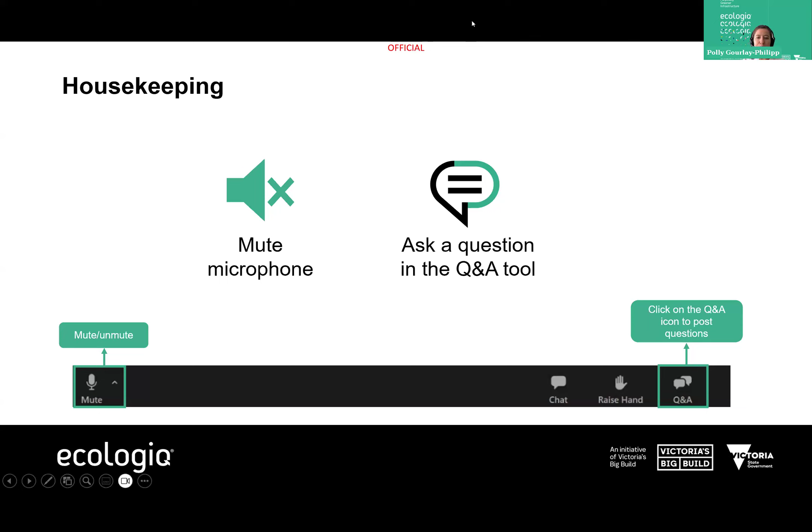Okay, so I will now hand over to our presenters, and they're going to give us an overview of their projects and talk to us about how they've managed to get recycled materials. Pass over to Daisy.

Daisy, I think you're on mute. Just unmute yourself there. Thank you, Polly. Still a novice with Zoom.

Good afternoon, everyone. I'll quickly do an overview of the sustainable material initiatives we're using for the Waurn Ponds duplication, and then we'll do a deep dive into the engineered containment of Category D soil, discussing what that is, the sustainability outcomes, the process to complete it, and some of the project opportunities we've identified. Then we'll discuss some lessons learned that should be incorporated into future projects.

You'll see on the top right-hand side a brief overview of our project. We're duplicating 8 kilometres of track, completing 2 station upgrades, and removing 2 level crossings with rail-over solutions.

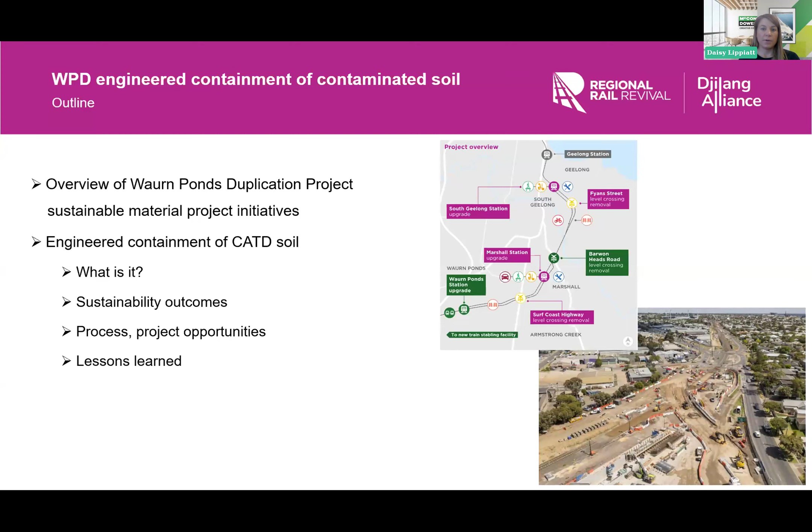Some examples of the sustainable material project initiatives we're completing include the substitution of the steel mesh in non-structural concrete with eMesh, which are recycled macro-synthetic fibres. We're also incorporating reclaimed asphalt pavement as much as we can on the project, and substituting concrete pipes with recycled plastic StormPro piping.

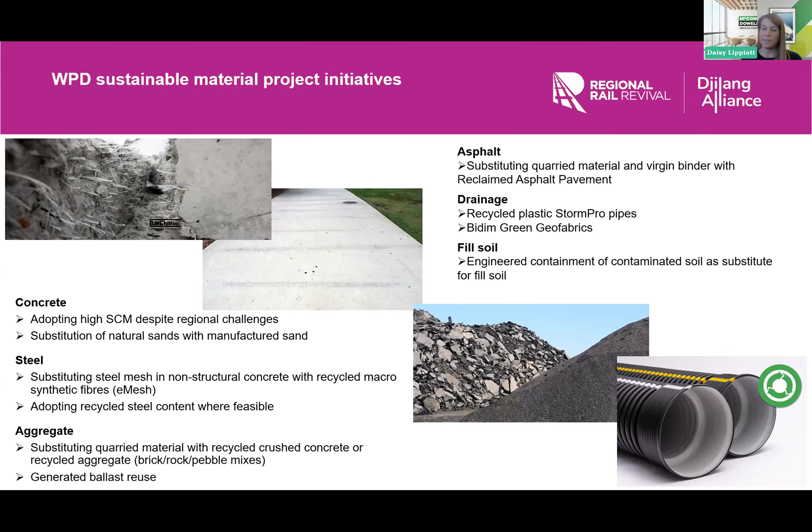So now it's time for the deep dive, contaminated soil reuse. Contaminated soil reuse is a permissible activity with EPA Victoria that requires an issued A17 permit from the EPA to complete it. The purpose of this is to create a meaningful, purposeful reuse of category waste soil that's sourced from a project to be reused within that same project area. The key thing is the reuse of the soil must provide amenity without causing any harm to the landscape or the community.

For those unfamiliar with contaminated soil, I've provided the different hazard categories in the bottom left corner. So you have Cat A soil, which is the most hazardous category, and fill material, which is the least hazardous. Recently, EPA created a new hazard category, Category D, to account for that lower environmental risk associated with a lower level of contamination that could potentially be reused, as long as the risk assessment is completed and you have EPA approval to do so.

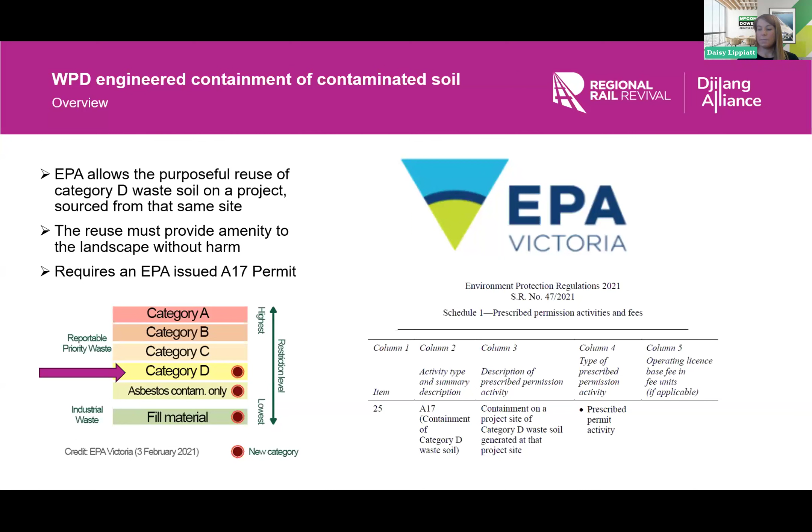Some examples of sustainability outcomes from the reuse of contaminated soil include a reduction in the carbon footprint associated with transport, since the soil is reused close to where it's sourced. However, on regional projects like ours, the closest disposal facilities are over an hour away. On top of that, instead of using clean material in these containment solutions, we're using contaminated soil that was destined for landfill. So it's a beneficial reuse that supports the waste management hierarchy.

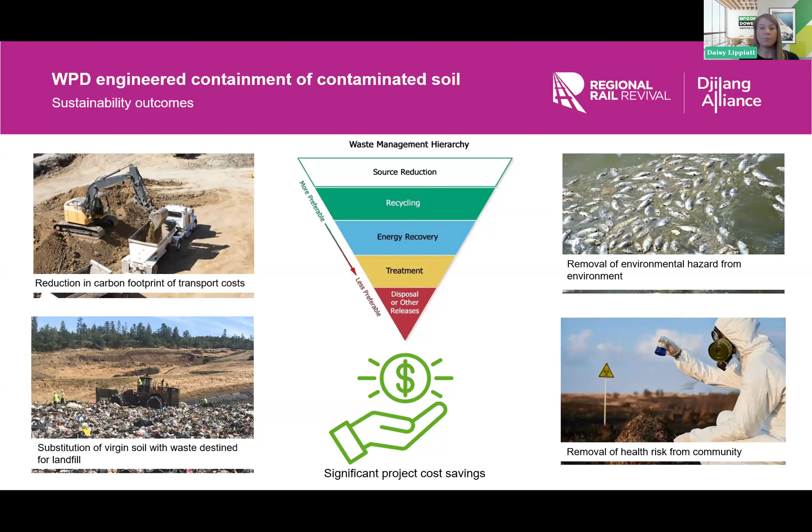The reuse of soil can also result in significant cost savings to each project. It's important to consider that we're actually removing the current hazard from the environment and health risks from the community into a contained, permanent solution.

The process for containment is a lengthy pathway, but can be done easily with enough project support. It starts with a feasibility assessment, where you look at the solution and opportunity available. You consider the land use, future land use, landowners, a cost-benefit analysis to check it's feasible, and the future development potential of that land. If the feasibility is viable, you can then look at the current design or modify it to facilitate reuse in that location.

Once the design is finalised, you complete a risk assessment that accounts for any sensitive receptors nearby the reuse location. Then you look at your reuse opportunity and run a series of models to determine the environmental risk.

For example, in the bottom left corner, we have an infiltration assessment we've completed for one of our reuse opportunities, looking at the amount of water that enters and passes through that soil, and whether contaminants might be carried with that water elsewhere, creating environmental harm.

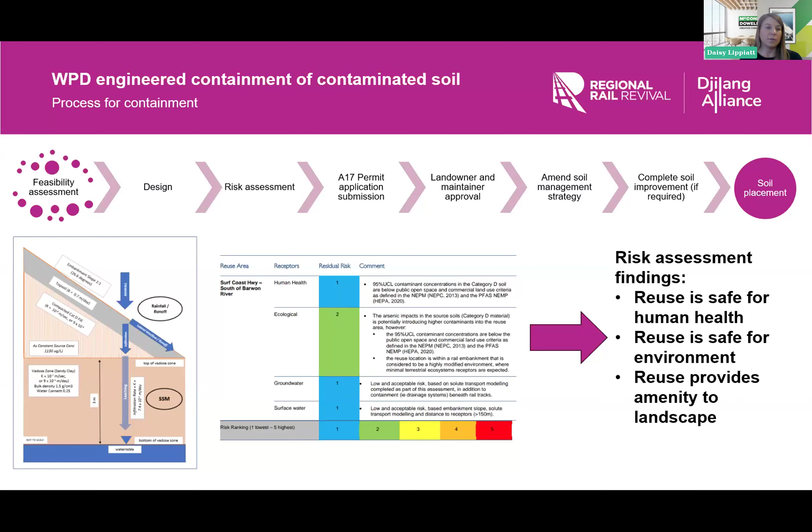If your risk assessment finds the reuse is safe for human health, safe for the environment, and provides amenity for the landscape, you can proceed to submit an A17 application to EPA. Whilst that's being processed, you can obtain landowner and land maintainer approval, amend your soil management strategy, and complete any soil improvements required before placement.

This is an example of some soil improvements that may be required on your project. When we started excavating the fill soils that were Category D, we found a high amount of inert waste in it - rubble, bricks, and so on. So we passed it through a screen, shown in the middle photo, which was 50 mil, removing all the large aggregate and improving the quality of the soil for reuse.

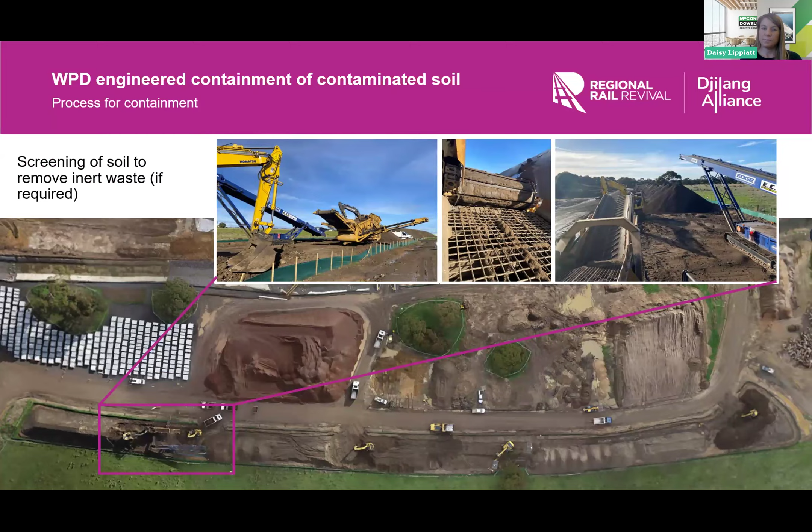In some applications, further geotechnical improvements are required to reuse the soil, and the project facilitated this with the application of lime, which is generally preferable to do in location. So as you place each layer of soil, you run a layer of lime. This also helps remove environmental risk because it locks in and reduces the leachability of the soil.

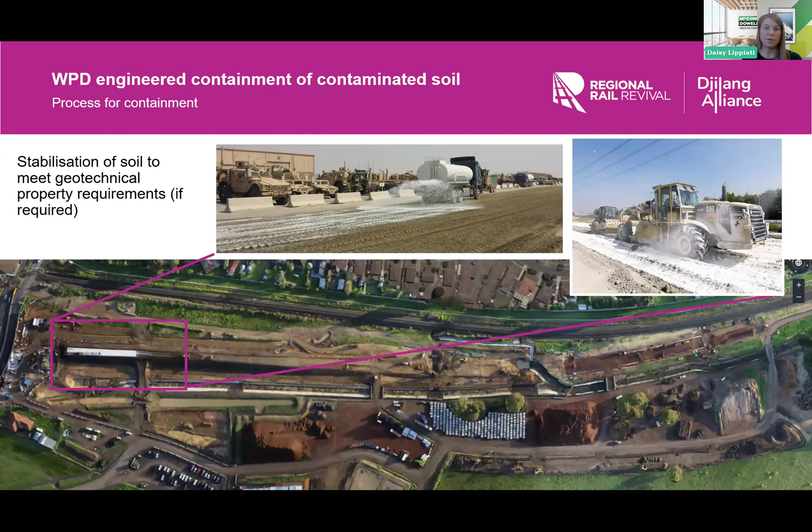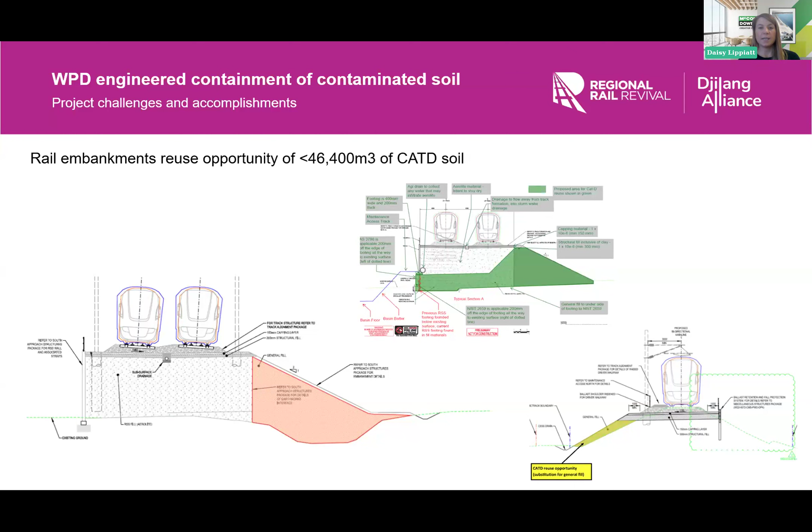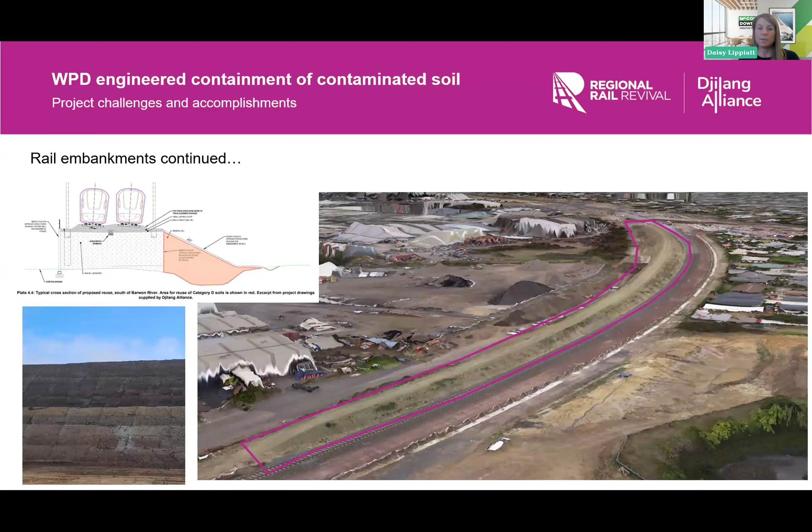I'll provide an example of where we're at to date with one of the embankment reuse opportunities. You'll see in the bottom right-hand corner that drone footage, circled in purple - that's approximately 11,000 cubic metres of Category D soil we've placed there to date. That's been screened and stabilised, and we've applied a polymer to it regularly to make sure it doesn't emit any dust during construction.

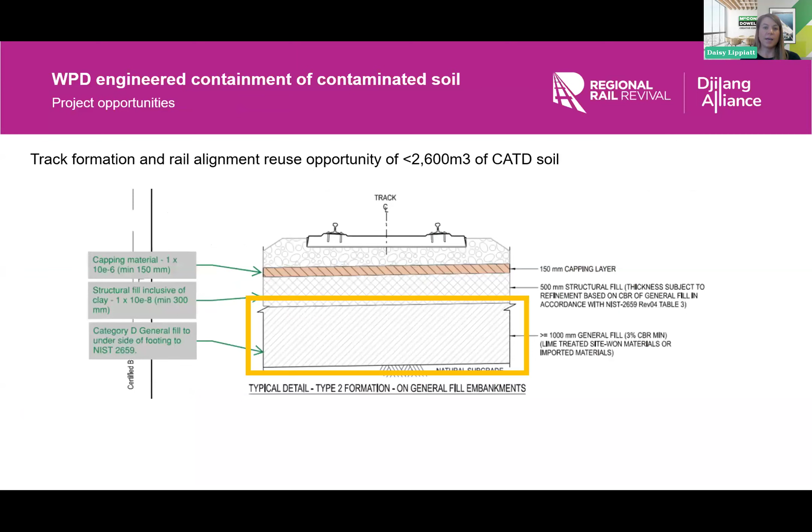We've also identified another 2,600 cubic metre opportunity of Category D beneath the track, and another 3,300 cubic metres within the station platforms where we could use soil to fill the platforms.

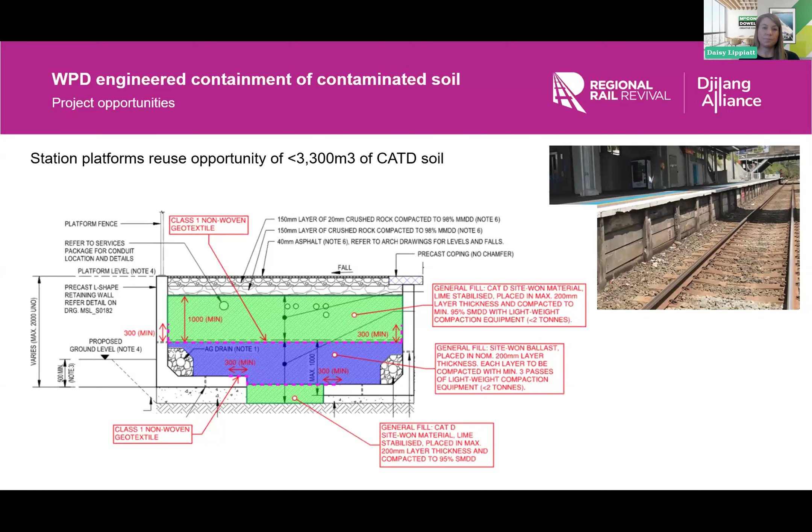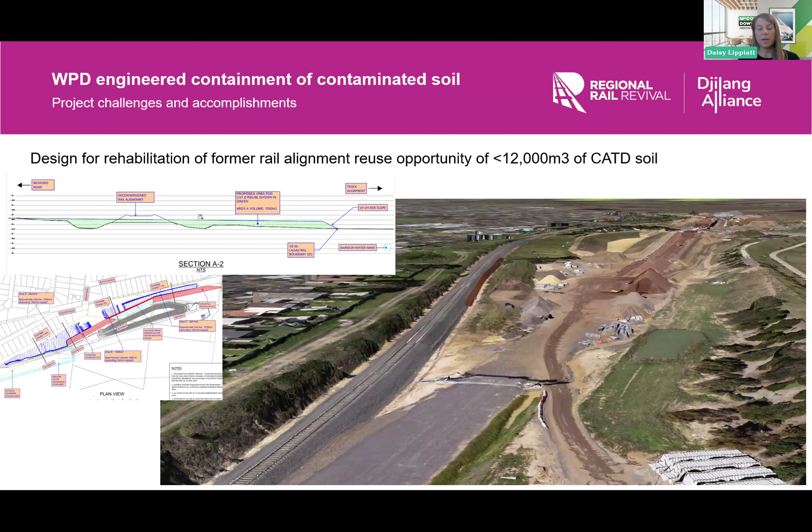This is another opportunity we just identified, in the same location, on the other side of the track, where the design solution has the rail embankment immediately joining the embankment of a pre-existing road. Obviously these two embankments will have large maintenance requirements to prevent erosion and facilitate speed of sheet flow. So we're currently doing a feasibility assessment to see if it would be beneficial to fill that area, and if so, we could substitute it with category D material.

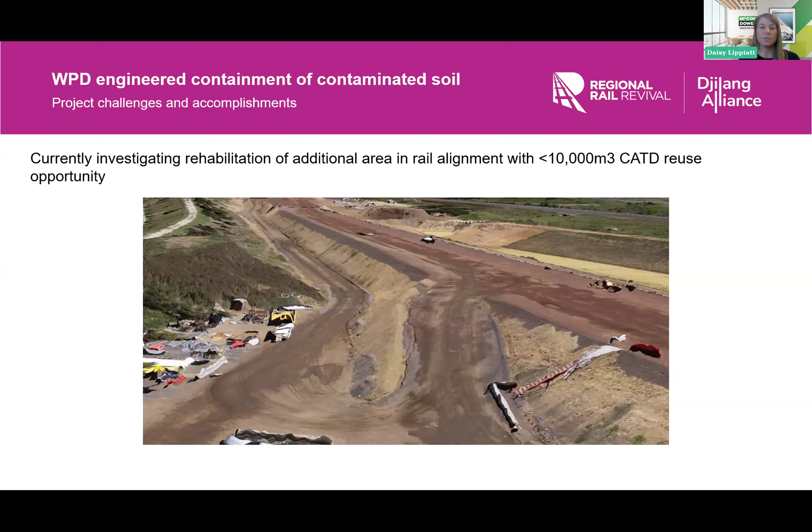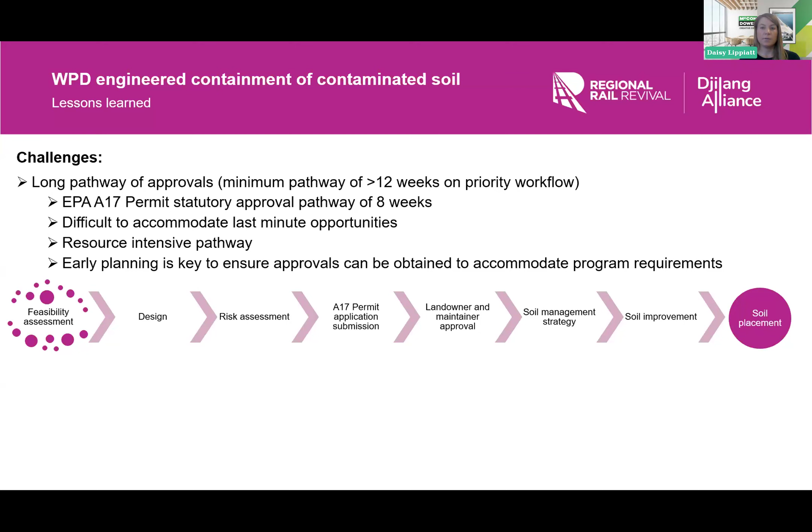Now to step into some of the lessons learned. It's important to consider the approval pathways for these opportunities, from design development to issue of A17 permit and landowner and land maintainer approval. Generally on this project, the timeline takes anywhere upwards of 12 weeks, with 8 weeks of that embodied in the statutory approval pathway for A17 permission. So it's obviously difficult to accommodate last-minute opportunities, which really enforces that early planning is critical for success.

The key driver of risk in the reuse of category D soil is the complexity of the material management strategy and the need to incorporate change into that strategy. At the very beginning, the project developed a mass haul diagram where we mapped all the soil that would be generated in each location at each stage of the program. We then compared that with the reuse opportunities we had, how much we could fit, when placement was required in terms of the construction program, and any foreseen risk where we might have to do soil improvements. This enabled us to identify the stockpiling requirements of the project.

It's important to accommodate an extra risk value in the size of your stockpiling area, because if you find soft spots or for other unforeseen reasons, you may end up generating more soil than forecasted. It's also really important to consider proximity to public in these stockpiling areas, depending on the soil classification, nature of the soil, or any treatment required, whether screening or stabilisation. These are dust-emitting activities and sometimes quite noisy, particularly the screening of material, so it's important to use areas outside of direct proximity to the public.

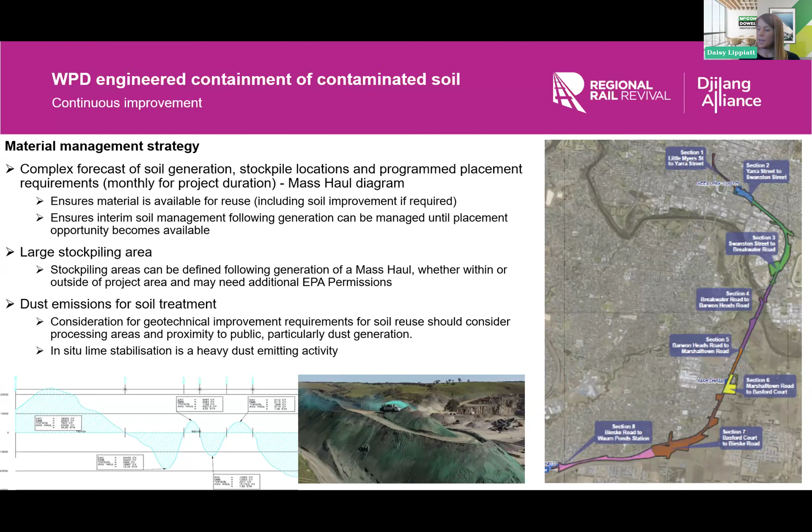An example of the challenges we had: I've provided a picture on the right-hand side of our project area. The blue and green area is where the Category D soil is being sourced from, and as you can see, it's a very confined rail corridor in very close proximity to the public. So for us to complete the reuse strategy, we hauled it to the other side of the project, shown in brown below, where there's a lot of agricultural area, which prevented public exposure and avoided other sensitive receptors.

Largely due to material management, we lost a couple of opportunities. Very early in the project, the program for generating the soil was actually behind the program for the embankment. That meant we weren't generating enough soil to feed the need to place soil in the embankments in the south. So essentially, we weren't able to utilise the full opportunities in both embankments because we just weren't generating enough soil, and we ended up having to substitute that with Site 1 clean fill soil.

Another unfortunate loss was the opportunity in the station platforms.

Obviously, you're not able to fit the stabilisation machinery within a platform. So the project was going through the process of having ex situ soil improvement stabilisation completed on that material, but the approval pathway outweighed the time we needed to place that material in an occupation critical program. That being said, our current forecast of Category D soil reuse is over 40,000 cubic metres across 7 different locations in the rail corridor.

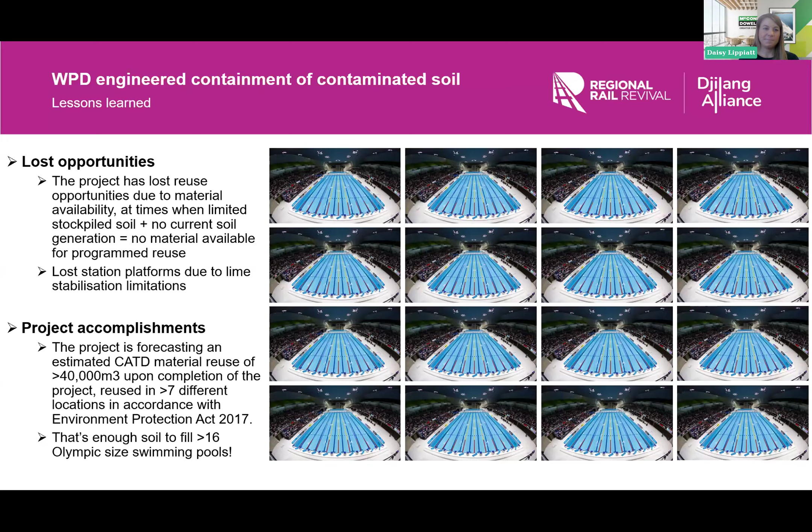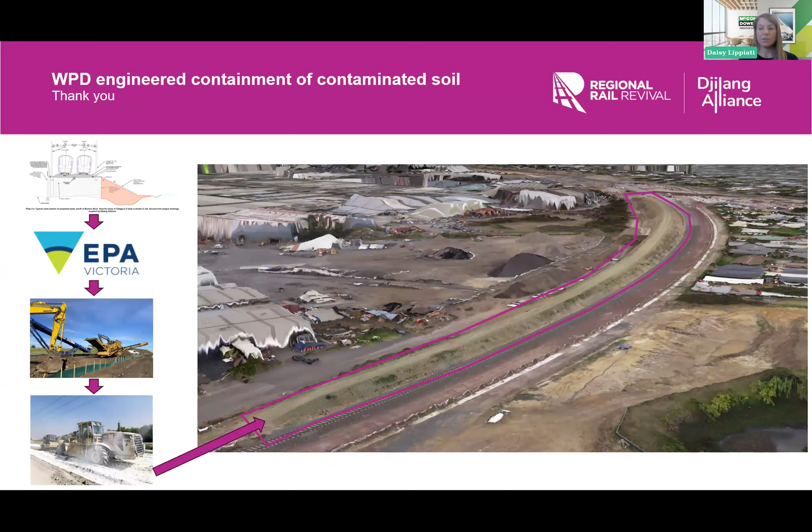Thank you so much, Daisy, and thank you everyone who joined in and all the panelists. I'm Akash, I work on the Shepparton line upgrade, as Paul introduced me. Quickly, an overview of the project: the Shepparton line upgrade runs between Donnybrook and Shepparton. It's a regional project, and the plan is to get the VLocity trains running on the line.

It's done in stages - stage 1, 2, 3. Stage 1 was just to have 10 weekly services. Stage 2 was upgrades at three stations - Nagambie, Murchison East, and Mooroopna - accompanied by a Shepparton stabling yard where we did 2 stabling roads, and a lot of signalling across 59 level crossings commissioned over the whole stretch of 120 kilometres.

And now we transition to stage 3, which basically did track upgrades to enable VLocity trains to run from 110 kilometres an hour to 130 kilometres an hour. Signalling upgrades as required, had road 3 added to the stabling yard, and minor works for culvert replacement, culvert repairs, track culverts, and drainage. One thing we also did was a Murchison crossing loop as part of stage 2, which is a 90-degree bend.

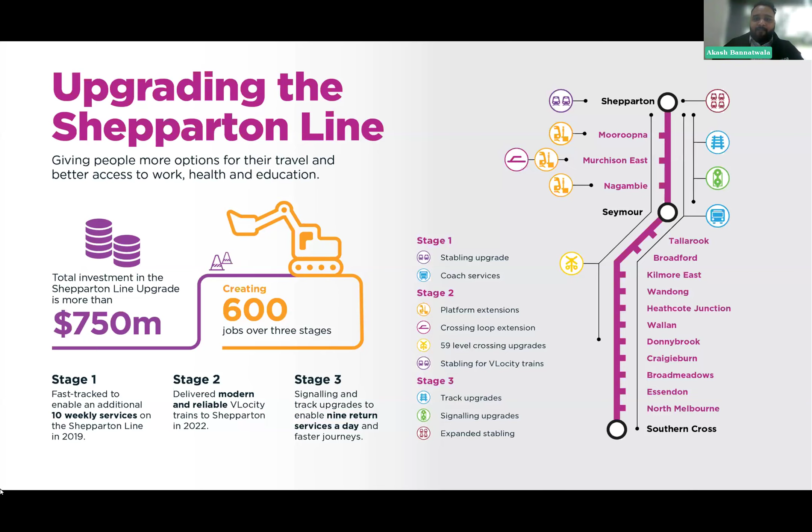Moving on to the sustainable products we used over the whole SCU project. Although being regional, we managed to get concrete mixes with 40% SCM into it. We're also utilizing e-mesh and MP47 fibers for reinforcement, and some fiberglass reinforced posts for the retaining walls for ballast retention. We managed to get a lot of our Cat D spoil, which came out of our mud spots, turnouts and track works, into a legacy gold mine remediation in Indigo. And for the CSR works, we did signalling conduits, which are multi-layered sandwich conduits.

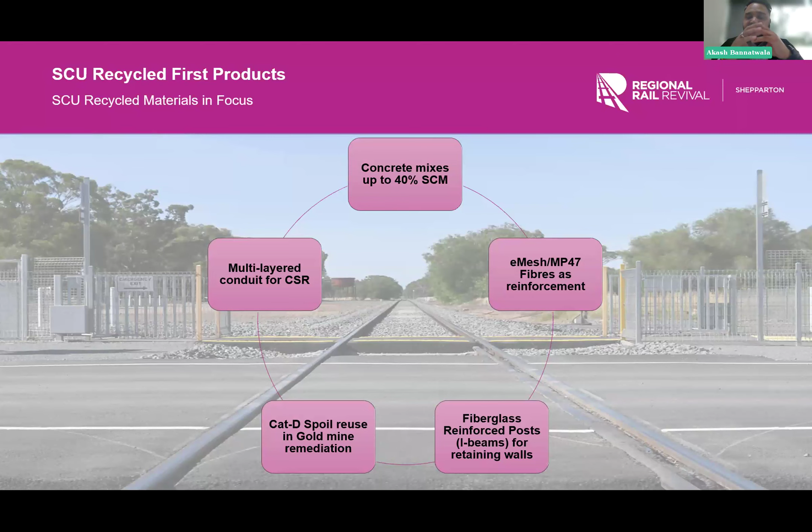Now I'll take you into detail of each quickly. Concrete mix first: the project was able to utilize a lot of EnviroCrete concrete mix, which has 40% SCM. The major areas where this concrete mix was used were kerbs, channels, a bit of laydowns, and a lot of road authority concrete mixes as well. Supply for us was Borough, and it was really good because it was a good mix in terms of getting the transport sorted and logistical cost sorted, since it was based out of Shepparton.

Next is our concrete track sleepers. These are broad gauge sleepers, and we replaced 55,000 timber sleepers with concrete sleepers. All our concrete sleepers had 20% SCM into them, which is slag. It came from Austrac, and it was a really good win for the project because it's a lot of precast concrete mix, precast concrete used on the job.

Next is the Select-Crete mix. The Select-Crete mix has SCM as crushed concrete, apart from slag or fly ash. Sometimes it's really hard to get a concrete mix which has a coarse aggregate used as a supplementary cementitious material. Our Select-Crete mixes are non-structural - we're using them in the signalling location boxes and concrete pads. We have 41 pads to build, so instead of crushed rock, we're doing some concrete pads. We're trying to utilize as much as we can, and Mawson's has that mix, which recently came up and is really good to use.

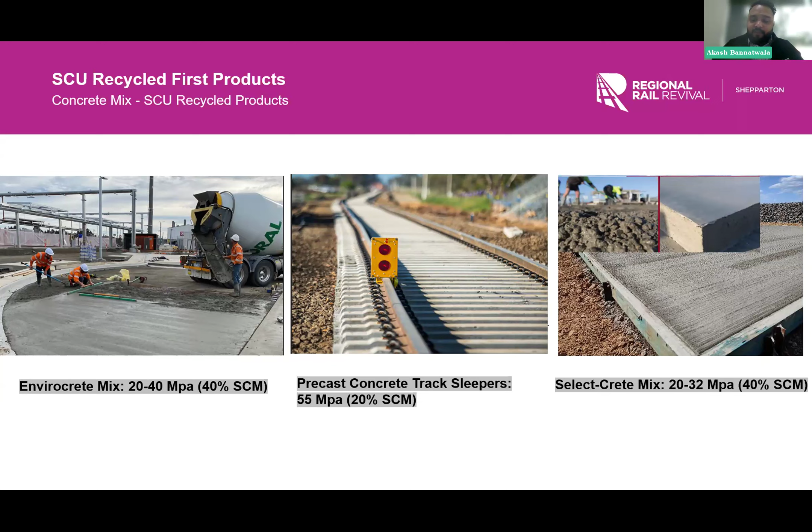Next, coming to our e-mesh and MP47 fibers - e-mesh, as everybody knows, is a really good fibrous mix that provides really good strength in terms of reinforcement. We plan to use e-mesh in the road or footpath extension we're going to do at Mooroopna Station. We're going to build a new footpath with e-mesh as reinforcement instead of steel bars. It's a really good win for the project in terms of sustainability, because the footpath is over 200 metres, and we're going to utilize across 100 metre cubes of concrete, which has added benefits as well, because you're saving cost on steel, manual handling, labor, and everything.

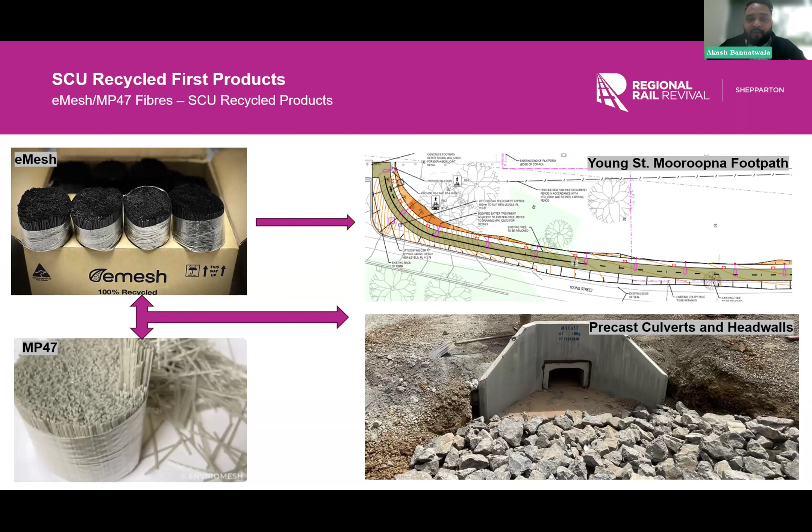So we're going to use that in our Young Street Mooroopna footpath extension. We also used some culverts, which came out of one of the suppliers, with a mix of e-mesh and MP47 as reinforcement. It was precast, and Burrell supplied that mix as well. It was actually a good win for the project in terms of all the reinforcement steel needed for a lot of culverts. The culverts were in sizes between 600 millimeters up to about 1000 millimeters. So that's one of the good uses on the project.

Moving forward to the fiberglass reinforced I-beams. During our design stage, when we were planning retaining walls for ballast retention, part of the track works involved lifting the track, which meant topping up with much more ballast so it can have a better payload for the trains traveling on it. So our designers and us came up with a solution to replace the steel posts with fiberglass reinforced I-beam posts, which are a fiber and glass mixed reinforcement.

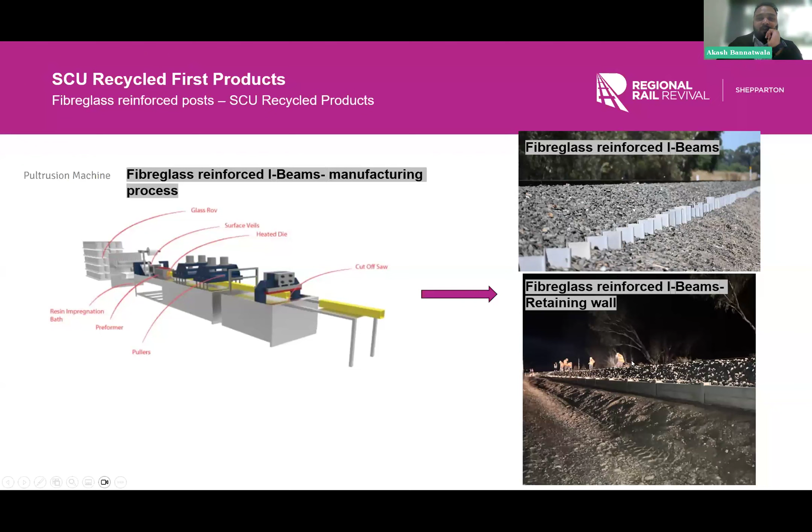It's basically a glass and fiber resin mix, manufactured through a pultrusion process, as you can see on the left hand side. This post looks exactly like steel, and it's a similar sort of material - a novel material with similar strength, maybe even more strength than structural steel. It helps with construction, and we can cut it to size if required. We installed around 400 of these across the Shepparton line.

Moving on to our Cat-D spoil. We found a lot of Cat-D material, which turned out to be arsenic and mercury impacted material, so there was no better end use for it. What we came up with is a process under EPA 1828 guidelines where you can have an EPA-based designator, and then find an end use for it. We had an EPA-based designator with specific requirements to be fulfilled for a gold mine remediation in Bendigo, a legacy orphan gold mine operated by DEECA.

So we transferred a lot of our Cat-D material for remediating this gold mine - we did 17,000 cubic meters up until last month. Basically, it's a cost-effective exercise because it's a symbiosis - the waste for one project or industry becomes a source or product for another sort of work. So it's a really good outcome for the project.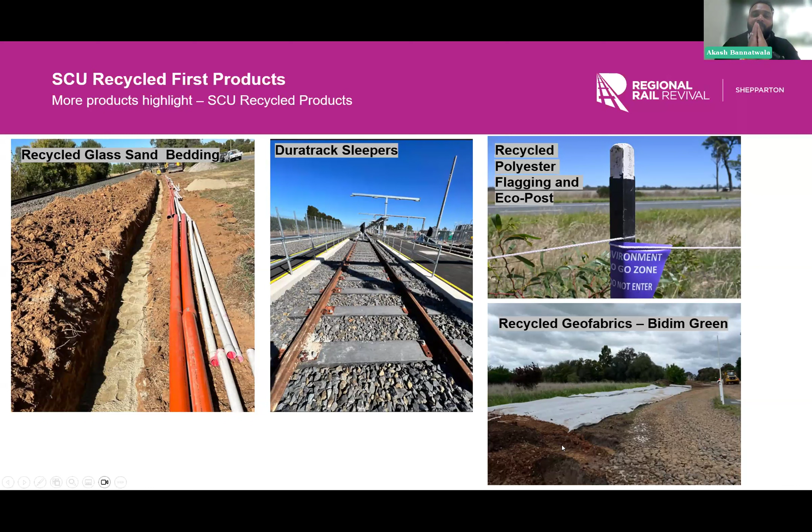And some of the sustainability wins and lessons learned on the project. The good wins I can talk about are that a lot of the products were part of a project contract and a Recycled First requirement, which really helps drive the use of recycled material. Finding regional locations or suppliers for regional locations, and doing it at the very start is key - it's really good because it gets included in the design as well, and then you can implement it thoroughly and get a good outcome.

We always workshop with our engineers and site supervisors so that they know about what we're doing - they know the good news stories, or not just the good news, but what the actual products or materials would do.

We also get a Q&A discussion session with them sometimes so we understand if that product is suitable or not. It's a good workshop between us and the engineers, which helps us drive more use of sustainable products across the project, and then also some subcontractor engagement.

Subcontractor engagement is most important because a lot of the works are done by subcontractors. So if you engage with them at the start, or during the works they're going to do, and put them in their contracts, you can get a good outcome out of it.

Some of the lessons learned, obviously the budget and the product and transport cost. The cost is always a variable in terms of the regional areas, and specifically transport cost. So we need to ensure that our budget is aligned with all the works we're going to do, and also try to find a middle point where we can meet and get things implemented.